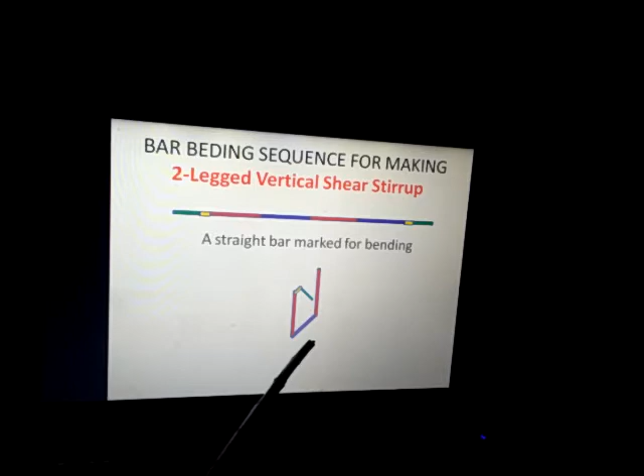The third band after this is a vertical leg, that is red color, and the fourth is the blue color, and the last one is the open end, the second end of the steel bar, which was straight initially.

These two ends, the first end and the last end of the steel bar, have been projected inside the core of the section, which will be filled with concrete. This core will give extra grip to the stirrups, so that it will not open up when there is deflection or torsion in the member during movements like earthquake movement.

In earthquake resistant structures, the specific code gives guidelines that the stirrups have to be given proper grip inside the core of the beam. So this bar is extra extended, approximately 10 times the diameter in length.

So the shape which has been created here, a rectangular shape, is the shape of a stirrup. The straight bar has been bent in a very specific way to form this shape, and this is a ring form which is used in the beam. It is kept in a vertical position.

You can see in this diagram there are two vertical legs shown by red color. These two vertical legs are the more effective part of this stirrup, which is going to support and give shear strength in the beam.

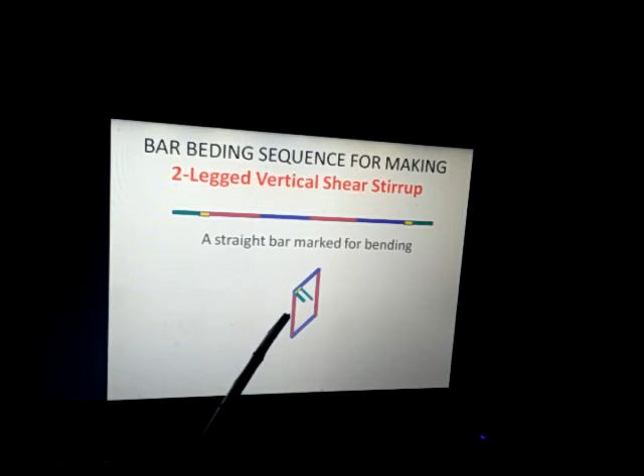To summarize, the first bending was at 135 degrees, followed by another 90 degree, another 90 degree, another 90 degree, and the last was at 135 degrees. By giving these 5 bends, this type of shear stirrup has been shaped to be used in a beam.

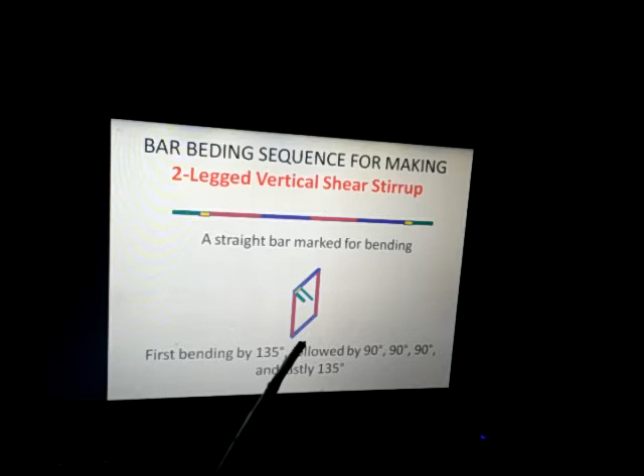Now it is to be used as a vertical, kept in the beam in a vertical position. So the name given to this stirrup is two-legged vertical shear stirrups. Now why is the word vertical more important here?

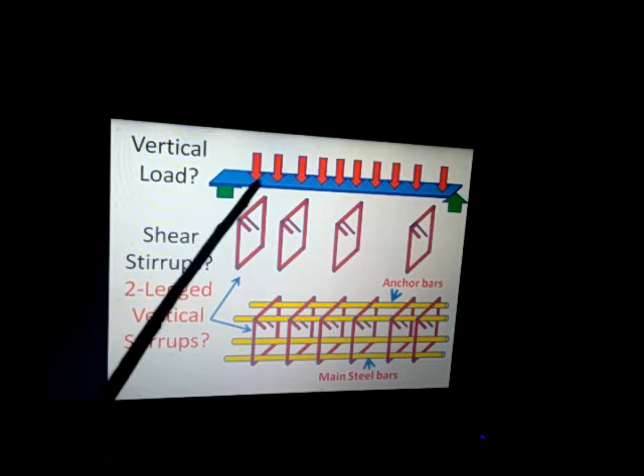You can see in the next slide a symbolic beam has been shown, and over this beam a uniformly distributed load, vertical load, has been applied. The beam is supported by two simple supports. You can see here the load is vertical.

Because the load is vertical, as per the principle of shear force, the direction of the shear force is also vertical. The vertical legs of the shear stirrups will be effective in the direction of the shear force. That is why we are discussing in this lecture the vertical shear stirrups, specifically two-legged.

So this is the two-legged vertical shear stirrups to protect the beam against shear stress. Now, in isolation, shear stirrups cannot be used in the beam.

When several shear stirrups are used at a particular spacing, center to center spacing of shear stirrups is important, which we will design later in this lecture. So several shear stirrups are used at a specific spacing.

Now there are 4 corners in the shear stirrup. The bottom corners are tied with the longitudinal steel bar, that is the main steel bar, and the upper corners are tied with the anchor bars. Therefore in every stirrup there are 4 contacts with the longitudinal bar, and all 4 contacts at the corners are specifically tied up with binding wire.

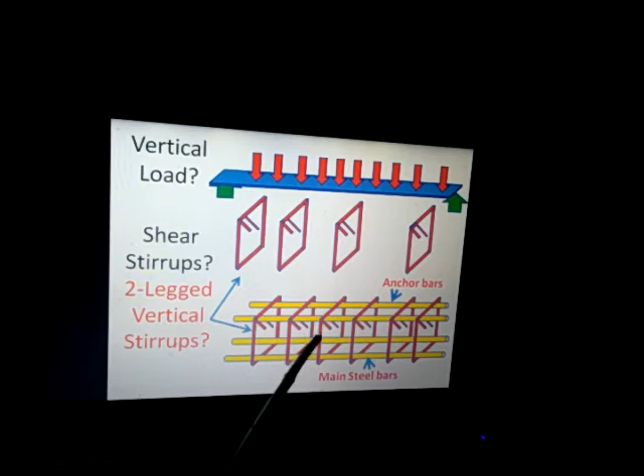So when we see how it is used inside the beam, if this is a portion of the beam, to show the shear stirrups it has been shown outside the beam, but in principle it is embedded in the beam.

So all around the beam, concrete is there. After casting of the beam, this entire longitudinal bar and shear stirrups will be embedded inside the concrete in the beam body, with the concrete surrounding every bar and stirrup.

After hardening, suppose after 28 days, the strength developed in this beam will be very good from the point of view of flexural strength. It will be very good in tensile, in flexure, and also very good in shear. So this is the shear stirrups placed inside the beam, shown by this type of exhibit.

Now shear stresses are more predominant in this case, and it comes because of shear force. So there are different types of shear stresses. In this slide we are going to discuss nominal shear stress, denoted by tau v.

So if a beam is loaded with a UDL, that is W kilonewton per meter, and its span is L, and the supports are simple supports, then the shear force at the support, that is the reaction at the support, is Vu, the ultimate shear force, equal to WL by 2. The tau v, the nominal shear stress, is calculated from Vu, that is tau v equal to Vu by BD, where B is the width of the beam, and d is the effective depth.

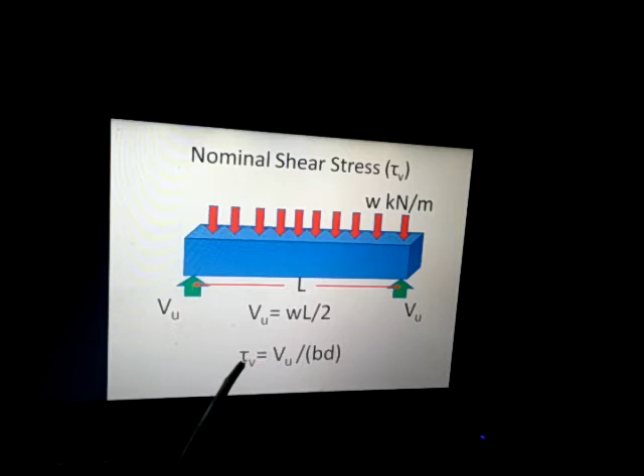The small d is measured from the top of the beam to the center of the steel bar which is embedded inside it. That is the small d, the effective depth. So tau v is calculated as tau v equal to Vu by BD, and this gives us the numerical value.

Now another type of shear stress is the design shear strength of concrete, which is an inherent property of the concrete material because of its ingredients, its way of casting, its type of cement, its curing, and overall construction practices. The RCC material develops its own shear strength depending on the grade of concrete and the percentage of steel used inside the beam, that is PT equal to 100 into AS by BD.

AS is the area of steel in tension, that is the longitudinal steel bar provided at the mid span, the positive tension steel. So the percentage of this steel is 100 into AS by BD.

Corresponding to this percentage PT and the grade of concrete, we can find the tau C, the design shear strength of concrete, denoted by tau C, from Table 19 of IS 456-2000 directly. This table gives the design shear strength of concrete tau C in Newton per millimeter square as per IS 456-2000, given at page 73.

In this table, the first column is 100 AS by BD, that is PT in percentage, and the other columns are the grades of concrete. So suppose if PT is 1.00 and the grade is M20 concrete, then we get the tau C value of 0.62. Similarly, for any value of PT, we can get the corresponding tau C value in the respective column for that grade of concrete.

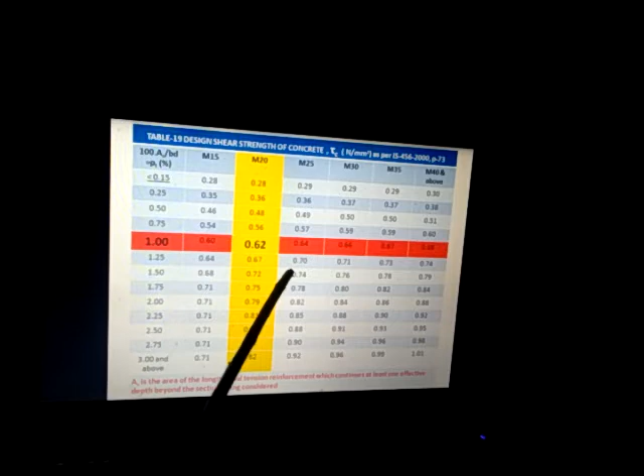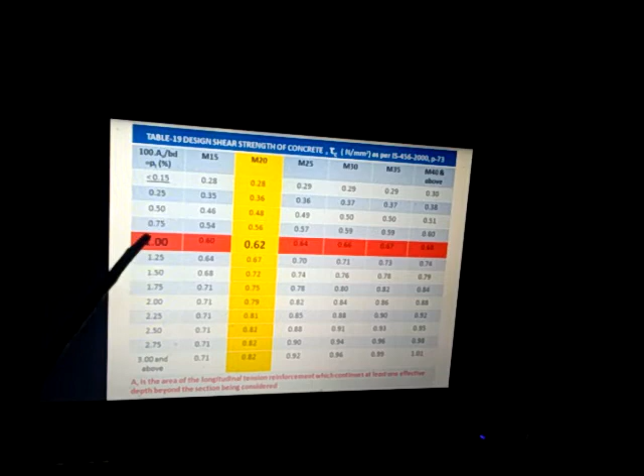Now what is the method of design of shear reinforcement? As per IS 456-2000 clause 40.3 and 40.4, there are two cases. The first case is tau v less than tau c.

In this case, the minimum shear reinforcement is to be provided, as per IS 456-2000 clause number 26.5.1.6, at page 47. A given formula is there, from which we can find Sv, the spacing between the stirrups. The minimum area of shear reinforcement will give us some specific value of spacing.

In another case, if tau v is more than tau c, that is when the external load gives more nominal shear stress but the design shear strength of concrete is less, then we have to provide extra shear reinforcement, meaning shear reinforcement is to be designed.

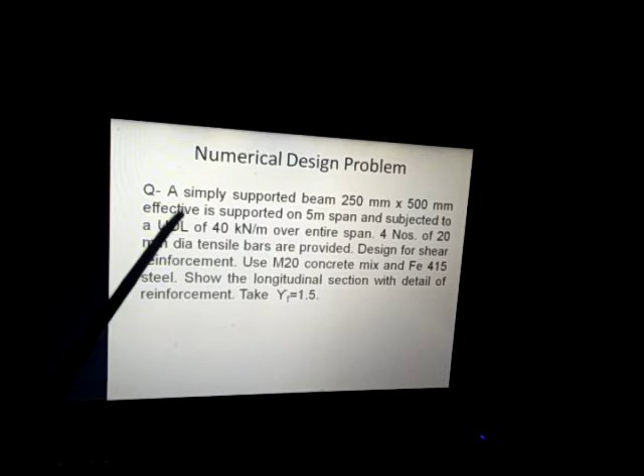To clarify this design problem, we have taken one numerical problem: a simply supported beam having 250 mm width and 500 mm effective depth is supported on a 5 meter span and subjected to a UDL of 40 kN per meter over the entire span. 4 numbers of 20 mm diameter tension bars are provided. We need to design for shear reinforcement, using M20 concrete mix and Fe415 steel.

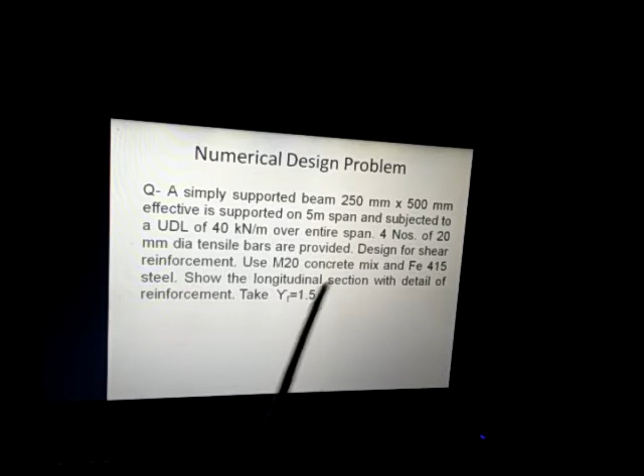The longitudinal section with detail of reinforcement shows gamma f, the partial safety factor for load, equal to 1.5. Various parameters are given in this numerical, and we have to find out the parameters for the shear reinforcement. To start the solution, we have given span 5 meter.

The width of the beam B is 250 mm, the effective depth D is 500 mm, FCK, the grade of concrete, is 20 Newton per millimeter square, Fy, the steel yield strength, is 415 Newton per millimeter square. If we assume effective cover as 50 mm, we get the overall depth of the beam, capital D, equal to 500 plus 50, effective depth plus effective cover, that is 550 mm.

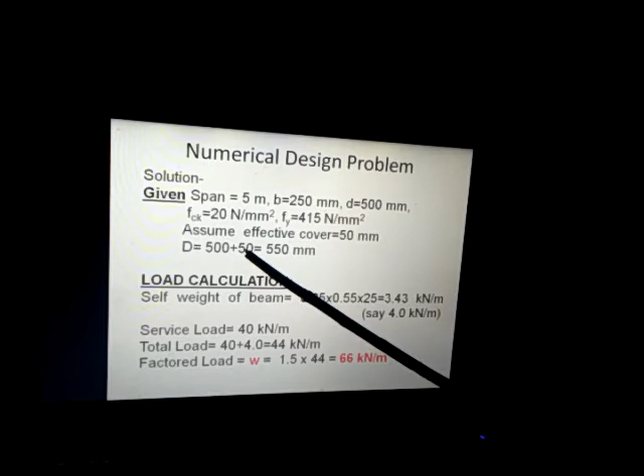With this data we can calculate the load. The self weight of the beam comes 0.25, the width in meter, multiplied by 0.55, the overall depth in meter, multiplied with the density of RCC, 25 kN per meter cube, which gives 3.43 kN per meter. We can round it here, say 4.0 kN per meter.

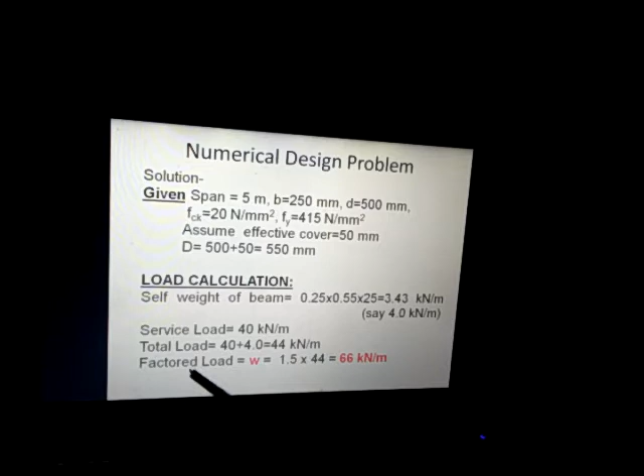Now the service load given is UDL 40 kN per meter. So total service load and dead load comes 40 plus 4, that is 44 kN per meter. So factored load, small w, equal to 1.5 gamma f multiplied by the total load 44 gives 66 kN per meter.

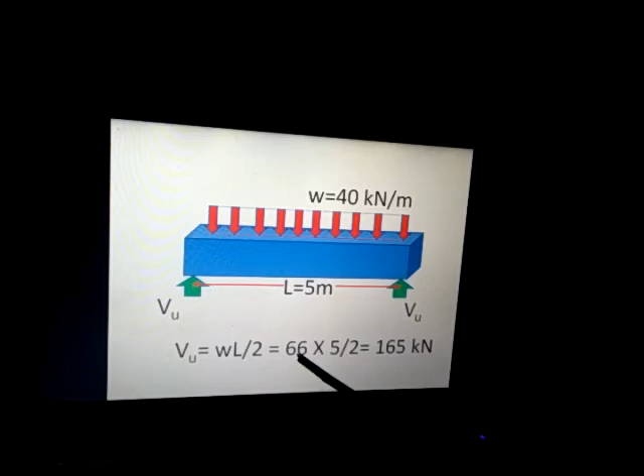Now we can visualize the beam loaded with service load 40 kN per meter over a span of 5 meter, but the factored load is 66. So Vu equal to WL by 2, that is 66 into 5 by 2, equals 165 kilonewton.

Now with this parameter, we can calculate the shear stresses. The nominal shear stress tau v is Vu upon Bd. Vu is 165 kilonewton multiplied by 10 to the power 3, that is Newton, divided by 250 into 500. So we get tau v equal to 1.32 Newton per millimeter square.

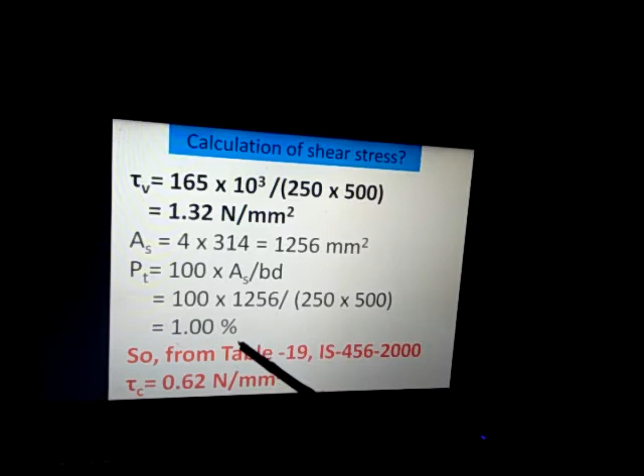Now the given area of steel in tension is 4 bars of 20 mm diameter. One bar of 20 mm diameter is 314 mm square, so 4 into 314 is 1256 mm square. The percentage of this steel is 100 into AS upon BD, that is 100 into 1256 upon 250 into 500, this gives 1.00%.

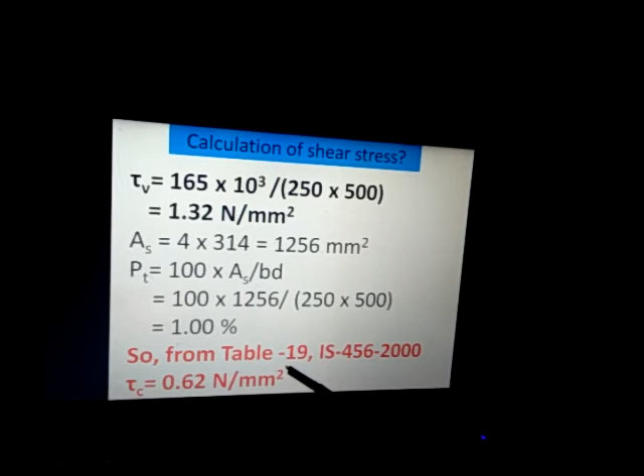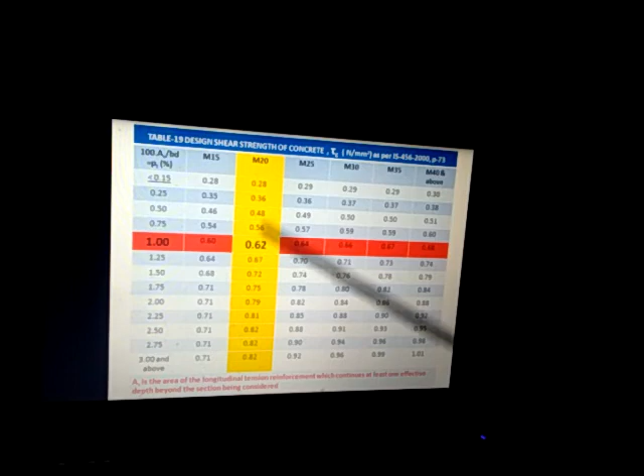From table 19, M20 grade of concrete, from IS 456-2000, we get tau c equal to 0.62 Newton per millimeter square directly, because 1.00 is available in the table, which we have already discussed. Corresponding to 1.00 for M20, it is 0.62. So tau c comes 0.62.

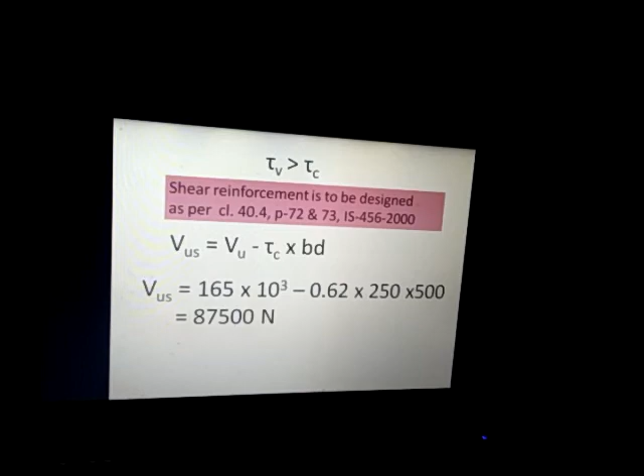Now we see that tau v is 1.32 Newton per millimeter square and tau c is 0.62. So tau v is more than tau c. According to this condition, shear reinforcement is to be designed as per the clause given in 40.4 at page 72 and 73 of IS 456-2000.

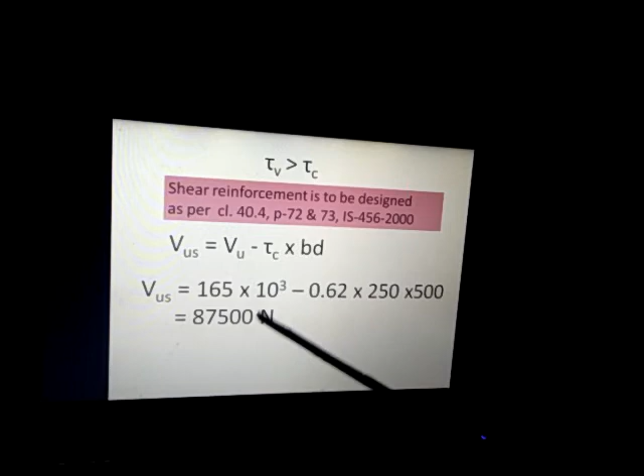As per this guideline of the IS code, we need to find out VUS, the extra shear force which is not protected by the concrete: VUS equal to VU minus tau C into BD. So 165 into 10 to the power 3 minus tau C 0.62 into 250, the B value, and 500, the D value. This comes to 87500 Newton. This value of shear force is to be provided by the shear stirrups.

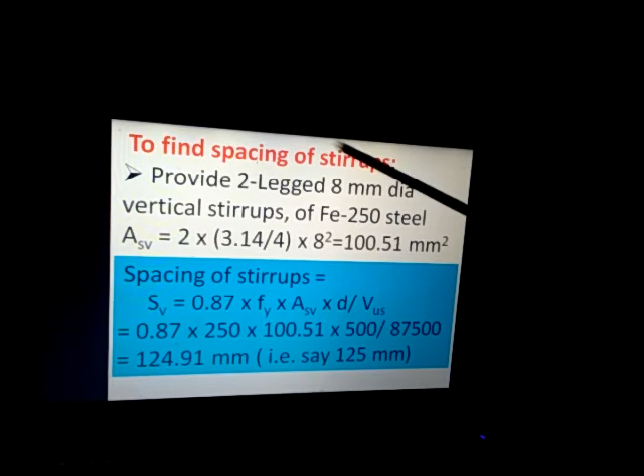To find the spacing of the shear stirrups, we can provide two-legged 8 mm diameter vertical shear stirrups of plain steel, that is Fe 250 bar. Generally for shear stirrups we use plain steel bars, and for better strength we use 8 mm diameter shear stirrup bars. This is two-legged vertical, meaning two legs are vertical.

From here we can find the area of shear stirrups vertical leg, that is 2 legs multiplied by pi by 4 d square, that is 8 square, which comes to 100.51 millimeter square. So we get the area of the stirrups vertical legs.

Now spacing of the stirrups, Sv, this comes from IS 456 page number 73. This Sv comes from 0.87 Fy into ASV into D divided by VUS, and putting all the values we get Sv equal to 0.87, Fy 250, ASV 100.51, small d 500, by VUS 87,500.

So this comes to 124.91 millimeter. We can round it off, say 125 millimeter. So we have obtained the spacing of the stirrups from the given formula.

Now check for maximum spacing. What should be the maximum spacing for this numerical data? We have calculated Sv equal to 125 millimeter, that the spacing of the shear stirrup should be 125 millimeter. But as per IS 456, it is given that the shear stirrups Sv value should be around 0.75 D, that is 0.75 into 500, which comes to 375 millimeter.

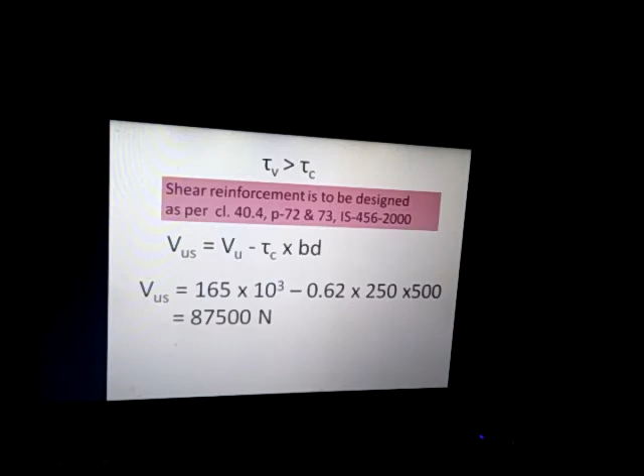So from this we can find out that SB for minimum shear reinforcement, this value is a type of maximum SB, Sv equal to 0.87 Fy into Asv by 0.4 B. So this is 0.87 into 250 into 100.51 Asv value by 0.4 into B, that is 250 millimeter. So this gives 218.60 millimeter.

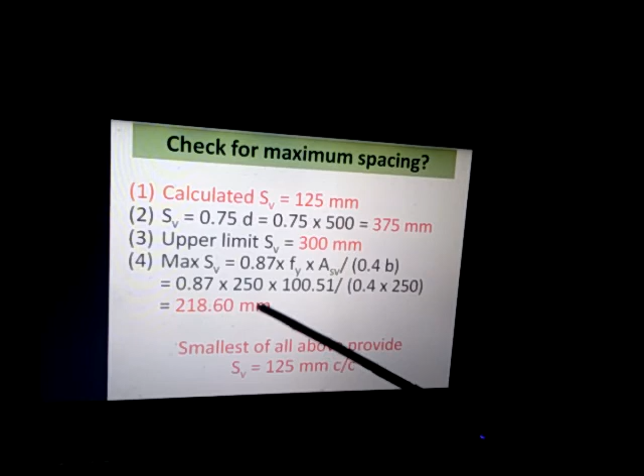Now out of these four values, 125, 375, 300 and 218.6 millimeter, whichever is the smallest, so smallest is 125, so we should provide Sv equal to 125 millimeter center to center spacing between the shear stirrups.

Now this spacing is to be shown in the reinforcement sketch with full detail. Now this is a cross section of the beam which we have designed.

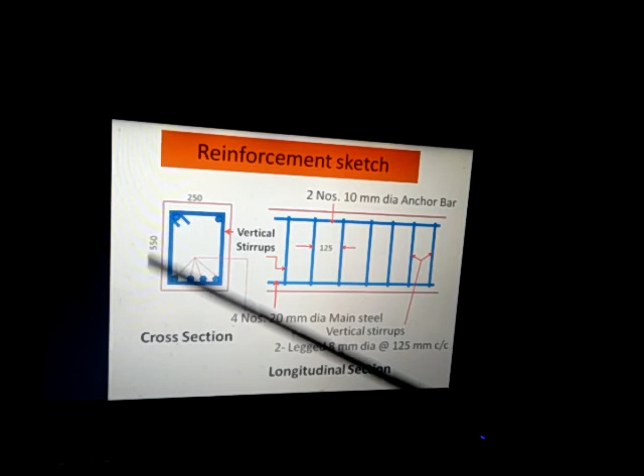In this cross section the shear stirrup is this one. You can see the open ends. So this is the shear stirrup, that is two-legged 8 mm diameter at the rate of 125 mm center to center vertical stirrups. And this is having four bars, 20 millimeter bars, that is the main steel bar at the bottom, that is in the tension face, and two anchor bars, that is two numbers 10 millimeter diameter anchor bars on the top.

Now when we get this longitudinal section, you can see this is the four numbers of 20 bars at this level, and the two numbers of 10 millimeter anchor bars at this level, that is the top near the upper face, and this is the tension bar near the bottom face.

Now these two are tied with the shear stirrups, and the spacing between the two shear stirrups, every two adjacent shear stirrups, is 125 millimeter center to center, which is shown here. So this way, this is the longitudinal section of the beam, including the main steel bar, the anchor bar and the shear stirrups.

And this is the cross section of the beam, including again the main steel bar, the anchor bar and the stirrups. The width is 250 millimeter and the overall depth is 550 millimeter.

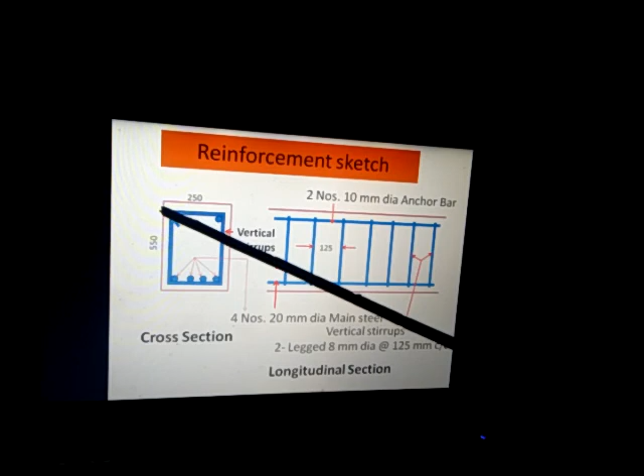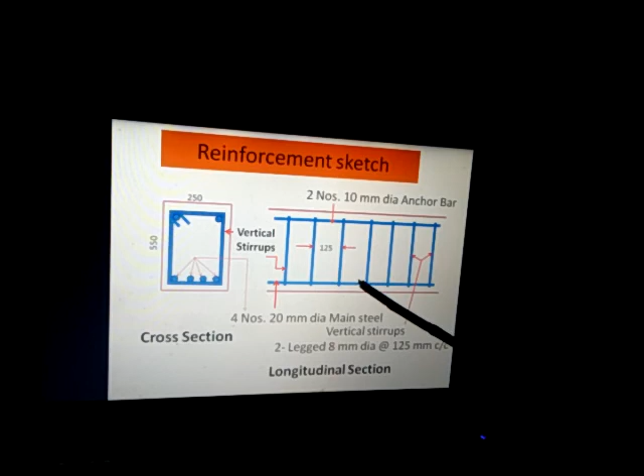So by this way we can show what we have designed, the shear stirrups for the given load, for the given size of the beam, and for the given percentage of the tension steel. Corresponding to that, for the M20 grade we got the diameter and the spacing of the shear stirrups, that is the vertical shear stirrups, two-legged 8 mm diameter at 125 mm center to center.

So this way we have designed the shear reinforcement. If we go through again, we have checked the stirrups. Again we should start from the beginning.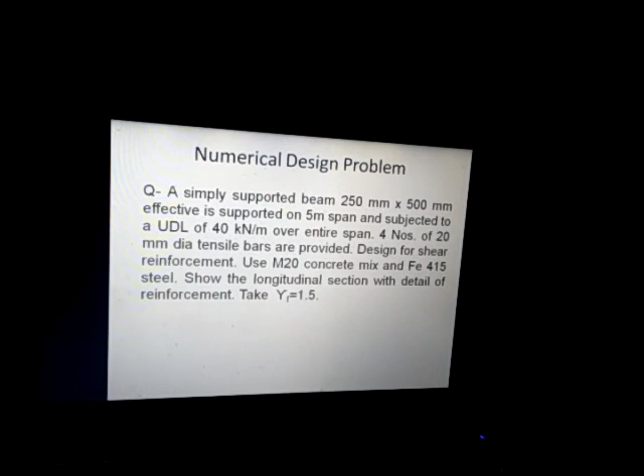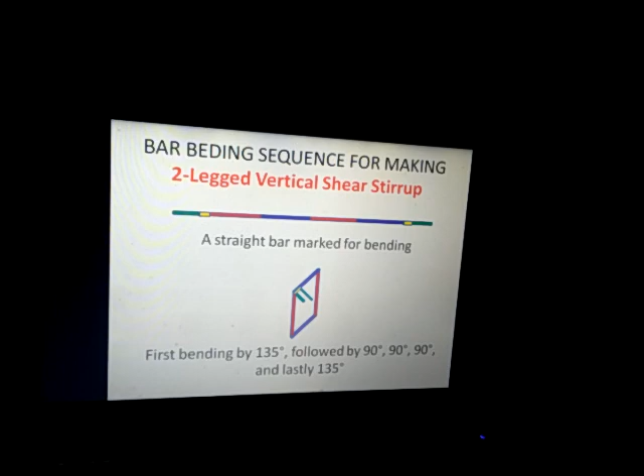In this problem we have discussed what is shear stirrups, how it is prepared from a straight bar. So 5 bends are taken and this is prepared. Then we have placed it in the beam in a vertical position. It has been tied with the main bar and the anchor bars, always kept vertical, in a vertical position. Why is it in a vertical position? Because the shear force is also having a vertical direction.

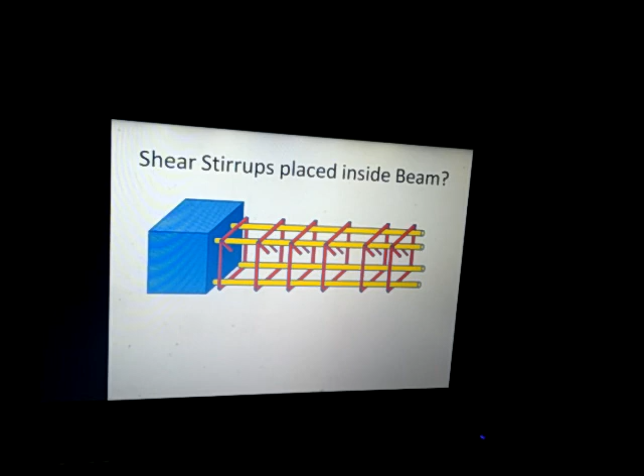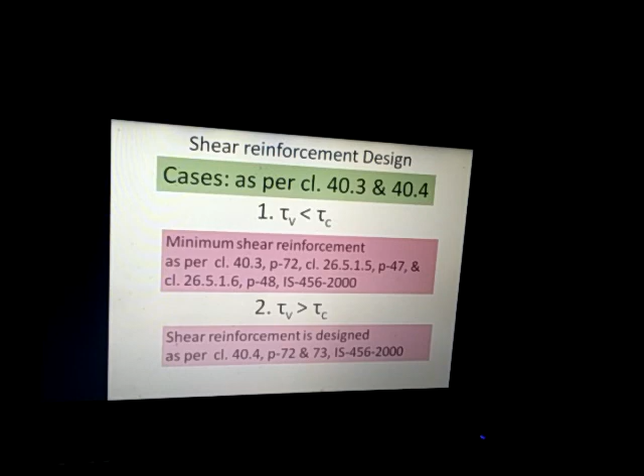So all the tied up bars with shear stirrups are kept inside the beam in the embedded form, and with this we have calculated tau V, that is the nominal shear stress. We have calculated tau C from table 19, and comparing these two we got that tau V is more than tau C, and for this we have designed the shear reinforcement in this beam.

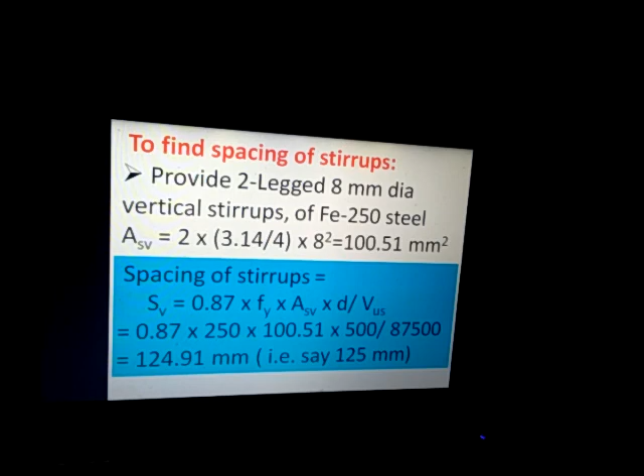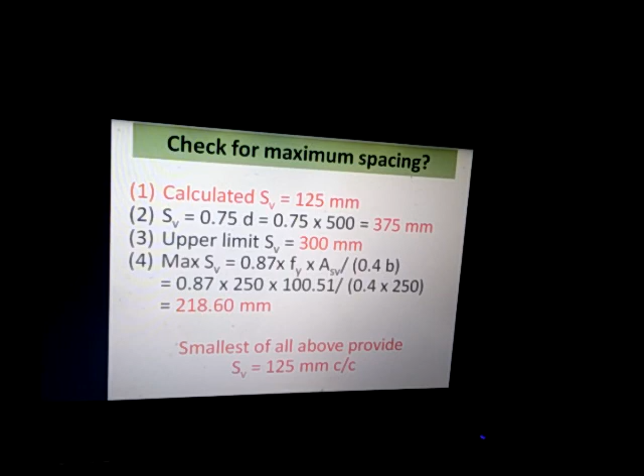And we have designed the spacing of the shear stirrups, and after designing the spacing we have checked for maximum spacing as per IS 456 guidelines, and finally we decided that it should have a spacing of 125 mm center to center, and finally we drew the sketch of the reinforcement details with the main bars, anchor bars and shear stirrups.